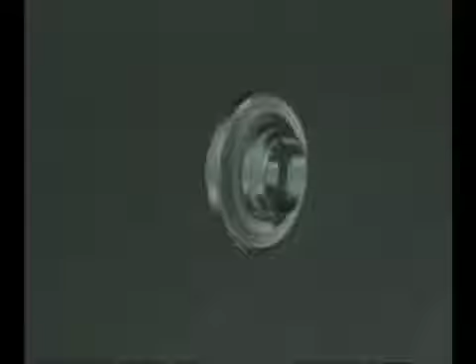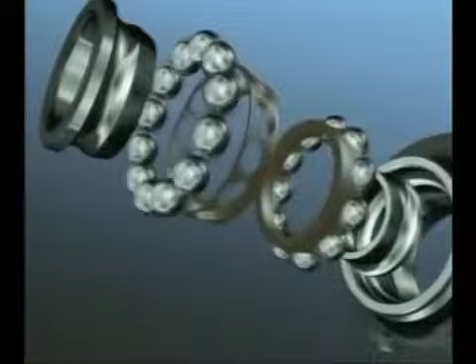Overcoming friction has challenged man ever since he invented the wheel. Friction occurs between contacting surfaces that are in relative motion. If the loads and relative movement increase sufficiently, without lubrication the surfaces will fuse together and seize up. The main purpose of lubrication is to provide a separating film to prevent this happening.

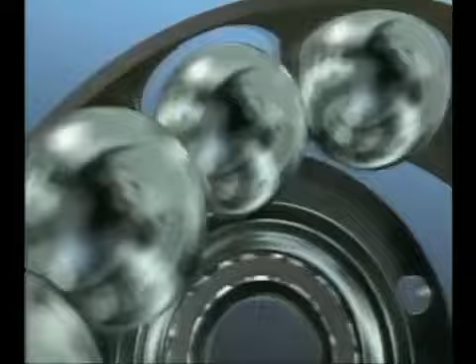For almost a century, SKF have been involved in the reduction of friction and wear by the development and manufacture of a range of rolling bearings and lubricants.

Rolling bearings can carry very heavy loads at extremely high speeds, and it's essential to have a film of lubricant between the surfaces. Mineral oil is generally used to create the very thin oil film, which is between 1/10 of a micron and up to 1 micron. Very smooth surfaces and clean conditions are required to prevent the film being penetrated and wear started.

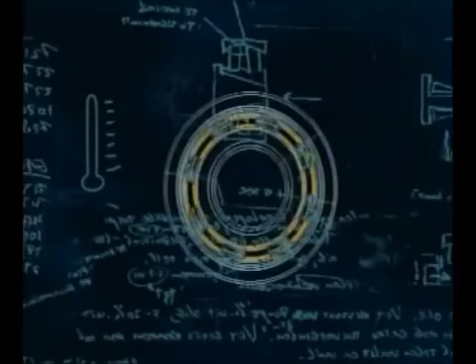To achieve an adequate oil film thickness within the bearing, a number of variables must be considered. The most important is the viscosity of the oil, which influences the film thickness. This is specified as centistoke, or millimetres square per second.

As viscosity changes with temperature, this is usually quoted at a reference temperature of 40 degrees centigrade. Viscosities used for bearing lubrication range from 2 centistoke, which is very fluid like water, up to 500 centistoke, which is comparable to syrup.

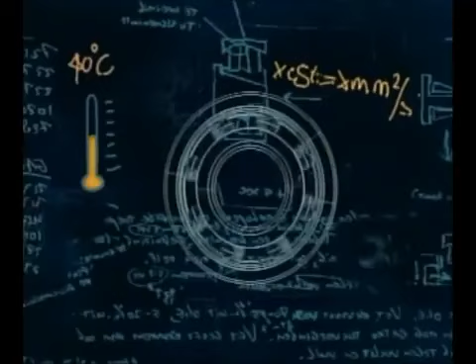The operating speed has an important effect on the lubrication film thickness. As the speed increases, a condition known as hydrodynamic lubrication develops, which significantly increases the oil film thickness. The effect is similar to aquaplaning.

At slower speeds, higher viscosity oils are required to maintain an adequate oil film. In very slow and heavily loaded applications, additives to improve lubrication are required.

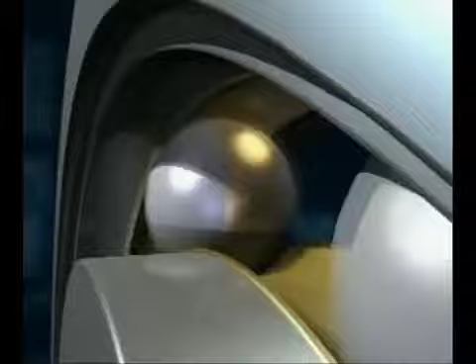Temperature within the bearing must be considered. The oil viscosity will reduce with increase in temperature, with a corresponding reduction in oil film. Oils with a high viscosity index limit the effect of temperature changes within the bearing.

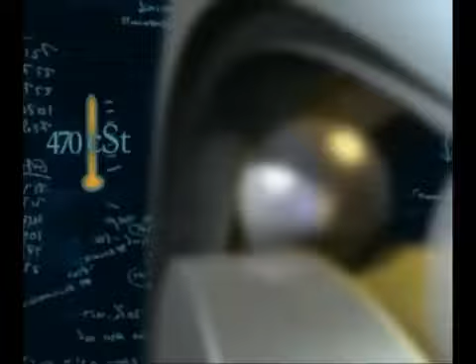The operating load has to be considered, as this has a direct effect on the contact of raceways and rolling elements. Grease is a combination of approximately 85% mineral oil and 15% soap or thickener.

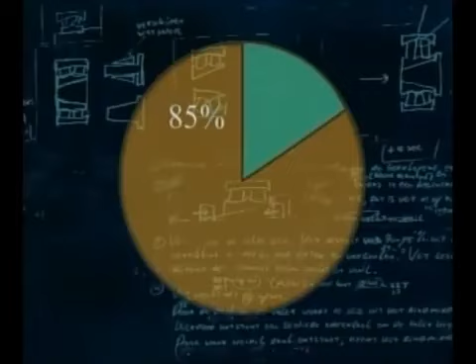The three main soaps or thickeners are lithium, a good all-round grease with a wide temperature range; calcium, which is recommended for installations exposed to water but has a 60 degrees centigrade maximum temperature; and sodium, which has good sealing properties but should not be used in wet applications.

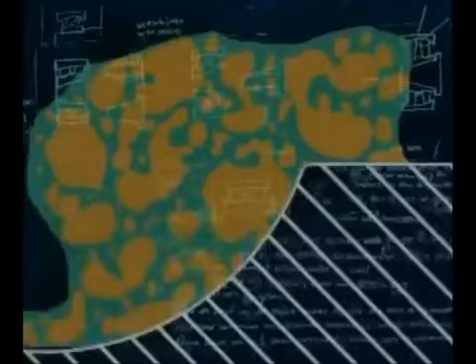All the soaps function in the same way. They retain the oil in a similar manner to a sponge retaining water. The oil is allowed to bleed out as the bearing requires it.

Greases are measured by their stiffness or consistency. This, like the oil viscosity, can change with temperature. For bearings, use the normal range of grease consistency, between 1 and 3, with 3 being the stiffest.

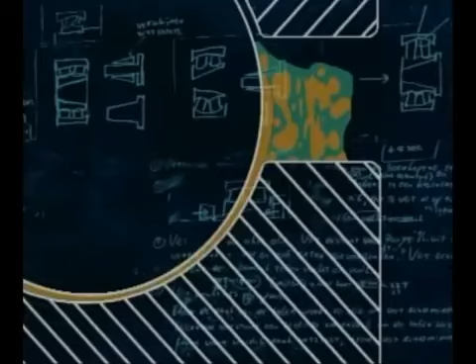Grease is by far the most popular method for bearing lubrication. It's easy to apply and retain within the bearing housing and can also function as a seal to protect the bearing. The bearing should be filled with grease, and the free space in the housing up to 50%.

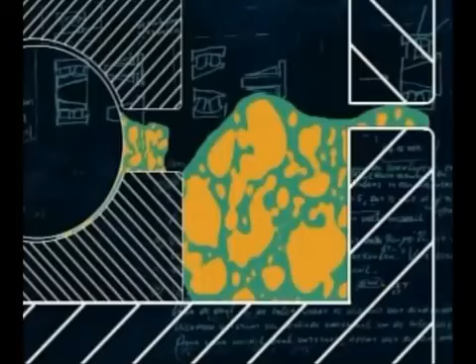This is to allow room for the excess grease to be ejected from the bearing during startup. In slow speed conditions where there's no overheating, a complete fill is desirable.

Oil lubrication is a very effective way to lubricate bearings but can present difficulties with sealing. There are several methods which are used, the static oil bath being the most common. The oil level in this instance should be halfway up the lowest rolling element.

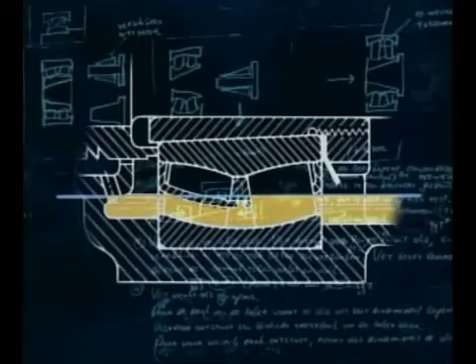In most gearbox applications, the bearings are lubricated by oil splash. On critical machinery, such as very large gearboxes or the drying sections of paper-making machines, heat and contamination can be a problem. In such applications, a recirculatory system is used.

Oil is fed by pump to the bearings, then allowed to drain back to a sump, where it can be cooled and filtered before reuse.

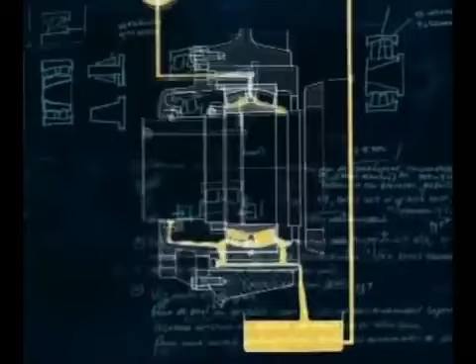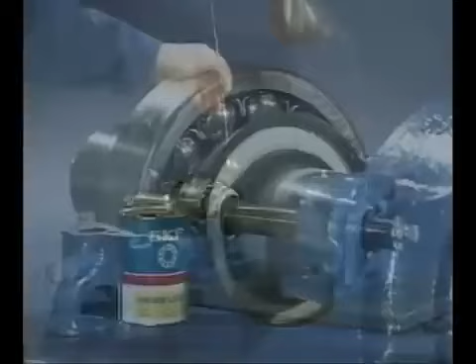With replacement bearings, it's essential to make sure that the bearing is completely full and the housing partially full of the correct grade of clean grease. Make sure the grease, like the bearing, is kept protected at all times.

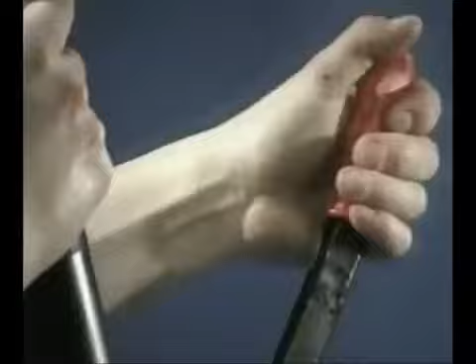In applications where the operating conditions are hot and where the environment is harsh, it may be necessary to re-grease the bearings. In these cases, provision must be made for the excess grease to escape from the housing. Regreasing should be done whilst the equipment is still rotating.

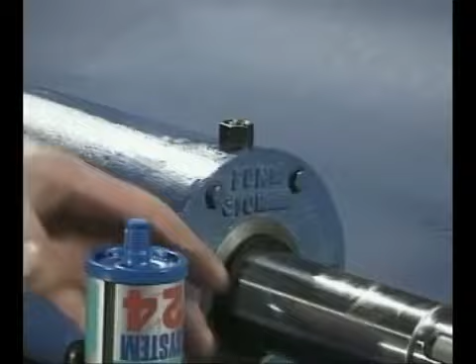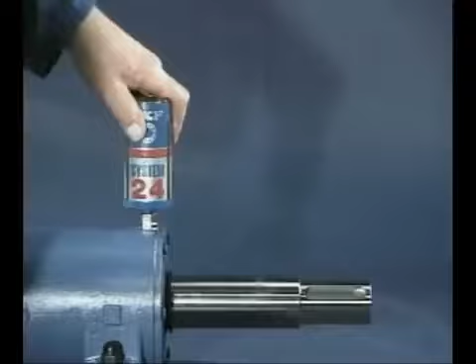In some applications, continuous lubrication is preferred. This can be achieved by a centralised system or by the use of an automatic lubricator. Ensure that the lubrication fitting is clean, that the right type of lubricant is used, and that the correct quantity of lubricant supply is set.

Sealed and shielded bearings are greased for life and should not be interfered with.